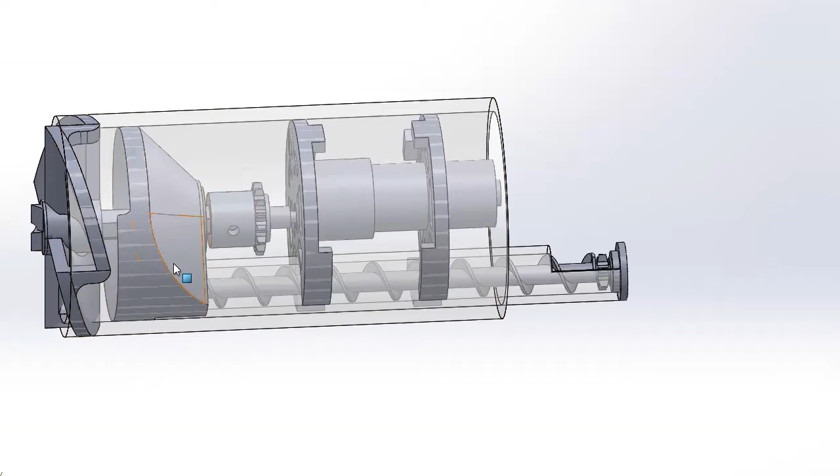So we have dirt at this end, of course, and it becomes loose. Then we're using what's called an Archimedes screw to push it to the back of the tunnel boring machine. This will be 10 meters or 30 meters into a tunnel, and we have to get the dirt that's being produced here all the way back out the tunnel.

So we've discussed a couple of different things, one of which being small pods that come up to the back of the vehicle, pulled along sort of like a chain, like a cable car system or a ski lift, that take on a load of dirt stored by the tunneling machine and then carted back out of the tunnel. They deposit the dirt out there, and then come back to the boring machine.

We've also talked about maybe an RC car system that is able to run up and down the tunnels, pulling the dirt out. And then the last idea we had, which is kind of stupid, was using high pressure air to shoot or pump the dirt out of the tunnel.

I was going to say, what about a vacuum type, vacuum hose? Yeah, like an air-water mixture could work. Slurries.

Yeah, there's a little bit of concern about that, that's a lot of complexity to add, and the ability for it to break. It's just when you add complexity, it becomes much more likely that you're going to fail. So I feel like vacuum might be less complex than autonomous cars driving back and forth, but I guess there could be an argument made for that. I'm initially skeptical of that, but

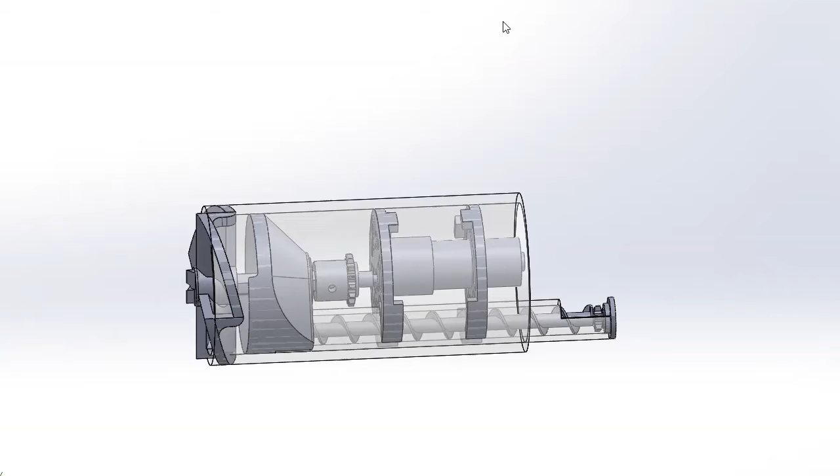Once again, let's loop it a little bit back towards prototype stages. So in terms of cutting heads, let's talk a little bit about cutting heads. What are some ideas that you guys have? I'll pull this off screen for a sec to not bias people, but what are kind of the necessary features that you guys are recognizing?

If you give me a second, I'll pull up a picture of the one I was imagining. Okay. One thing I was considering is there has to be space kind of for the material to fall down before it gets sucked back in. So there has to be some space after the cutting head. The cutting head just can't be flat up against the surface, because there has to be room for the dirt to fall down and be pulled out the bottom.

Yeah, I'll share my screen real quick. So I was imagining one of this, which is how traditional tunnel bores are, where it's just a flat radial surface with saw blades placed in strategic positions around it, and the whole thing just rotates and cuts up the dirt. The dirt gets fed into it, which then goes through an Archimedes screw out the other end.

Yeah, my one concern with that, so the reason I kind of steered away, is that I think it's a big part of the limiting factor right now for current boring machines - the amount of dirt cut away per rotation is pretty minimal. The feed rate. Yeah, so maybe it's a matter of increasing the tooth size.

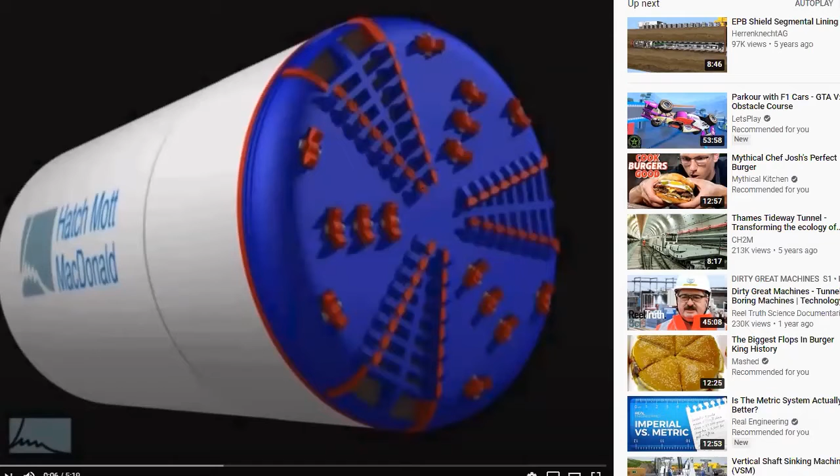Sure, I think it's going to depend a lot too on the type of soil or rock we're going through, because Dan's design would work better on dirt, but if we're going through hard rock, we need something more aggressive. Yeah, and that's definitely something they've still not provided any details on, but they said they'll provide more details in the coming weeks.

Yeah, it seems to me like what we're going to dig through is going to be a curated selection of materials. I imagine that means rocks, but I bet they're going to tell us that rocks are limited to a certain size.

That's my initial impression. It's also possible they say they've got gigantic boulders that we'll have to navigate around with sonar, but in terms of a first-year competition, that seems pretty stupid to me. So we'll pretend like that's not a possibility for the moment.

Let's see here, quantity of blades. So what do you think the trade-off is there, Cody, for quantity of blades and feed rate?

I had the equations earlier. I found a full sheet of boring-related equations. It's like a torque equation that takes into account the cutting speed using the diameter of your cutting head, and then the amount of cutters you have on that cutting head, and some other things.

There's the cutting speed equation, which takes into account the diameter and some variable n—I don't remember what n was—but you use that cutting speed to then find the machine time, and the feed rate, which is how much dirt you're pushing in and out of the machine. That's used to find your penetration rate and so on, which translates to how fast you're moving through the dirt.

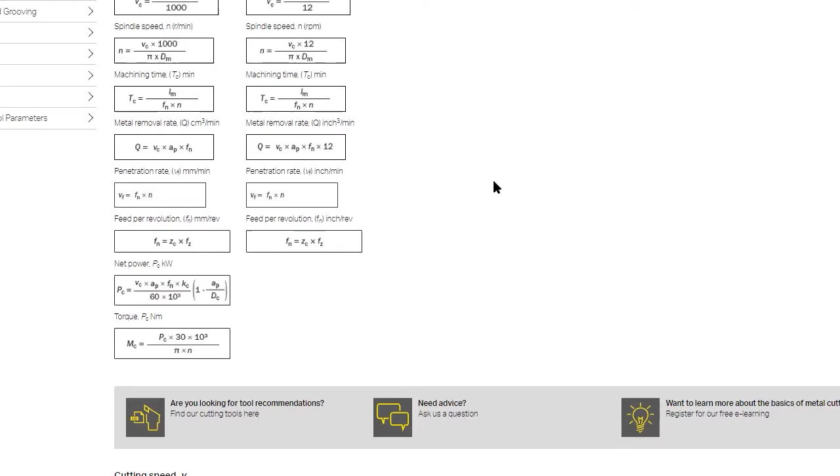Okay, that's a good resource. The one thing we should look into is it looks like these are for machining bores—these are for boring through metal and things like that, but it translates kind of similarly, I found.

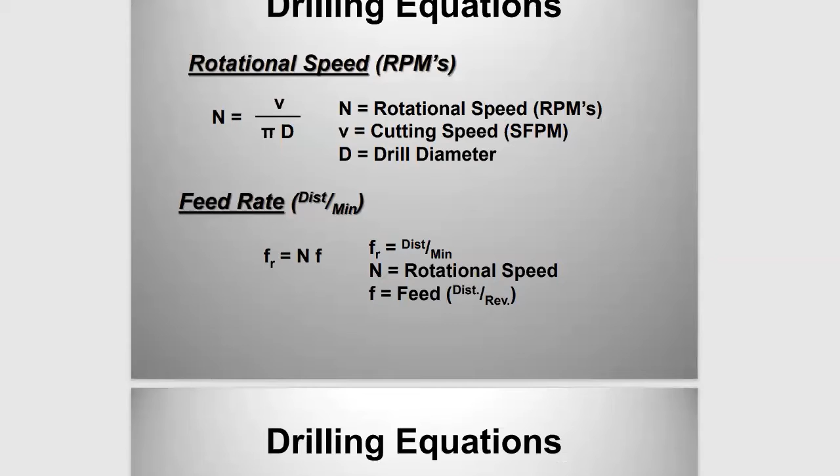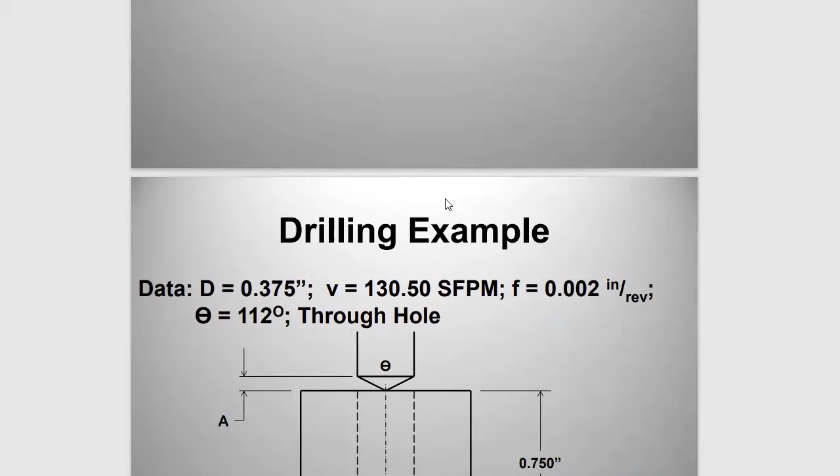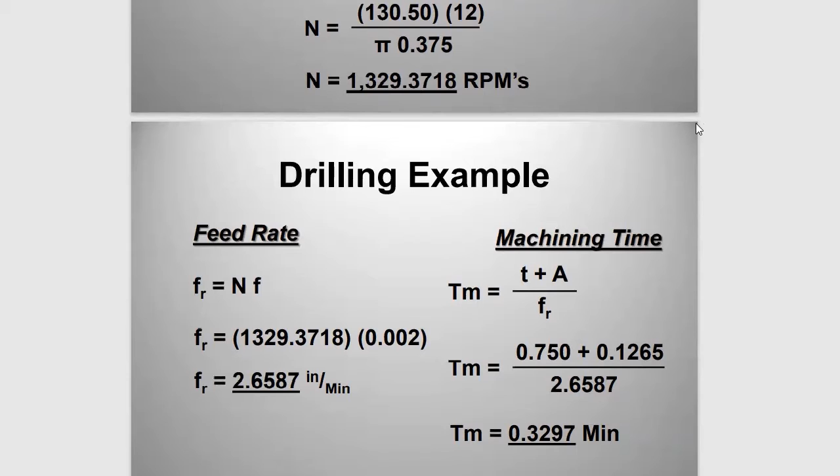We should just make sure that the scale works, because boring a 2-inch hole through metal is one thing. I'd be curious to see how the assumptions would scale when you're boring a 20-inch hole or a 200-inch hole. But I think this is a really good place to start the math off that we can do our analysis with.

It might be good—I don't know if you'd be interested in this, Cody—but trying to pick apart why it might be a bad way to do the math rather than its merits. I agree that seems like a good facsimile for figuring out the math for digging a hole, but it'd be good to have an analysis of why it would be a poor method. Do you understand what I'm saying?

Yeah, I read through a few research articles on tunnel boring and real tunnel boring machines, and they seem to use similar equations and vocab, like feed rate and all that stuff. So I feel like they translate pretty well. I'm sure there's probably differences in the constants, and the equations are probably a bit more complex than the ones for a simple drill, but I feel like they can be translated pretty well. I would need to actually research and find the real extra complex equations probably.